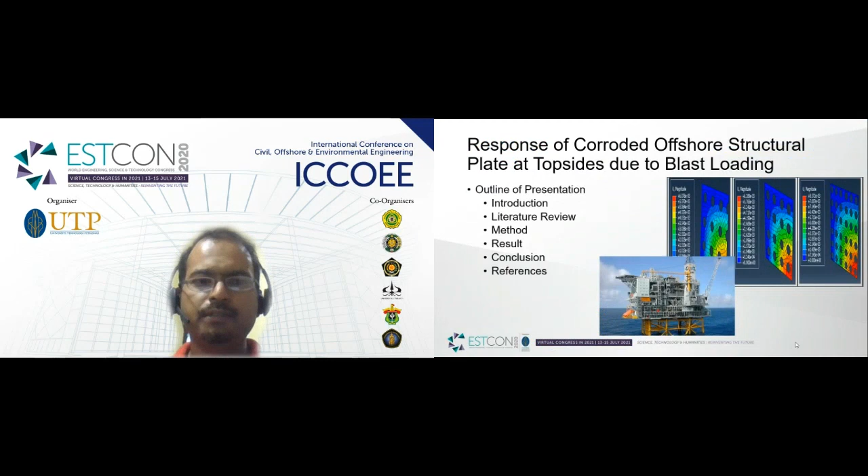Going into introduction, we know that offshore platforms are typically put in harsh environments and deteriorate during the period of operation. About 20 to 25 years is the typical lifespan of the platform. Corrosion is a common phenomenon.

It reduces the strength of structural elements, and blast in offshore platforms is a hazard, with many accidents recorded in the past, mostly at topside elements. Offshore platform design must meet safety requirements subjected to extreme loading conditions, and blast is one of the vital extreme loadings, generating the most impact.

It is important to know the response of an aged offshore topside structure that has undergone corrosion subjected to blast loading, as possible accidental explosions could occur.

There are numerous studies on the effect of blast loads imposed on non-corroded structures, but very few on corroded structures with blast loads. So in this study, we represent the offshore platform structural element as a plate element.

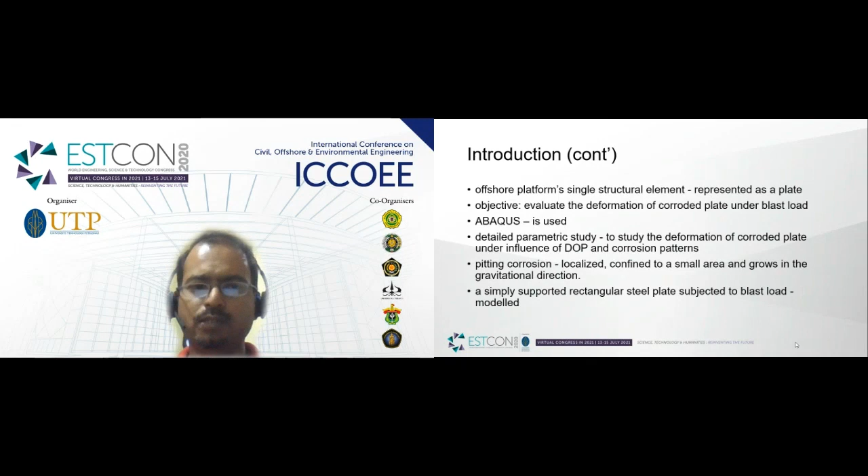We have utilized different corrosion patterns. Pitting corrosion is a localized form confined to a small area and grows in the gravitational direction. For this study, a simply supported rectangular steel plate subjected to blast load was modeled and studied.

Looking at the literature, blast load is categorized as temporal and spatial pressure distribution. Pressure rise time, maximum pressure and pulse duration are the temporal parameters, and the pressure is considered uniformly distributed. Response towards blast load may either be determined by nonlinear dynamic FEA or by simple calculation.

FEA stands for finite element analysis. Both methods should be based on single degree of freedom analogies and elastic-plastic method of analysis. Blast response is classified into 3 domains: impulsive, dynamic and quasi-static.

Looking at the past studies, we can highlight a couple of studies done by researchers recently. One, for example, looked at the transient response of stiffened plates subjected to underwater shock loading, investigating the displacement time histories of plates under different shock loadings using FEA.

Another study examined experimental and numerical studies on rectangular plates subjected to underwater explosion, looking into strain rate considerably affecting the deformation time history.

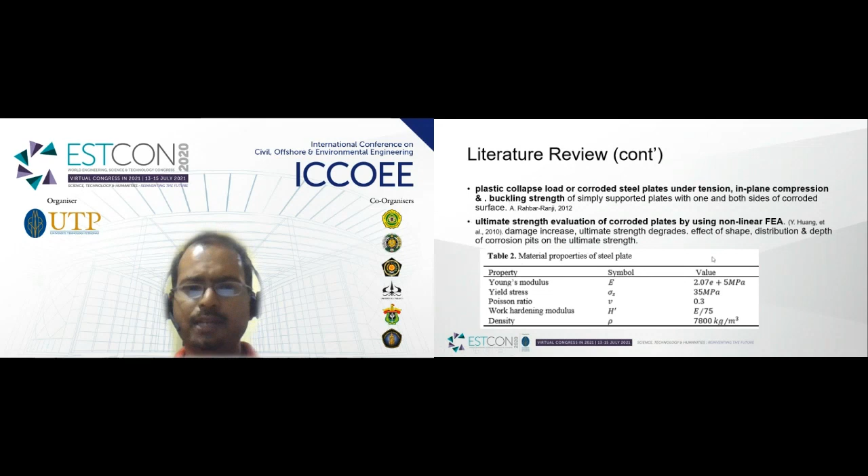Coming to my study, we have modeled the blast in an impulsive form. Following this model, shown on the table, there was a linear increase to 2.5 bar, and the pressure is maintained for a certain period of time before coming down to zero again.

All this happens in a very small time frame, 0.1 seconds or 100 milliseconds. The plate is modeled as a 10 mm thick plate with a breadth of 600 by 600 mm, a square plate.

The aspect ratio is 1, slenderness ratio is 60, and no geometric imperfection or welding-induced residual stress is modeled. It is a simply supported boundary condition plate. The model uses 3D deformable shell elements with a solid and homogeneous section.

The corrosion is modeled as a cylindrical pit with a diameter of 30 to 40 mm, located at the plate surface, pressure face, with the corrosion pattern on one side of the plate only. Material properties are assumed according to Table 2 shown earlier from the literature.

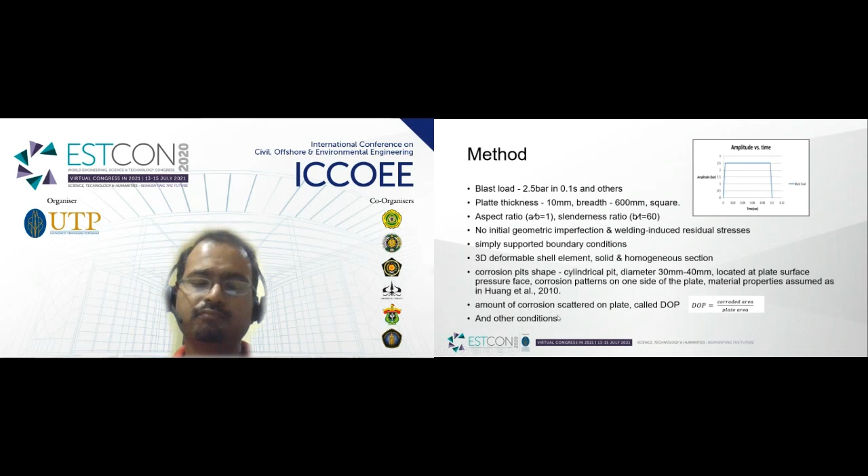The amount of corrosion is measured in a ratio called DOP, which is the corroded area over the plate area. DOP is the degree of pitting. And also many other supporting conditions are mentioned in the plate.

So coming to the results. When we analyze the plate with a couple of different degrees of pitting affected by blast load, the blast load was varied in different milliseconds. Since the plate is quite big, 600 by 600, we tried to minimize the modeling effort by having a symmetrical model, analyzing a quarter of the actual size. You can see the different figure frames showing the different degrees of pitting adopted, in terms of the physical position and the diameter of the pitting.

The graph shows results in terms of percentage of deflection, measured according to this formula: corroded deflection minus uncorroded deflection, over the uncorroded deflection. So this is how we obtain the percentage of deflection.

When we look at percentage of deflection over the different degrees of pitting, the one on the left bottom axis is the smallest, the one on the right is the highest. We can see a slight upward trending pattern up to a certain extent, and suddenly there's a big jump between the maroon and the green colors, which is actually 22.4 percent to 28 percent. There's a vast jump in deflection percentage, and after 28.28 percent, it gradually trends downwards. So this is an interesting fact we found.

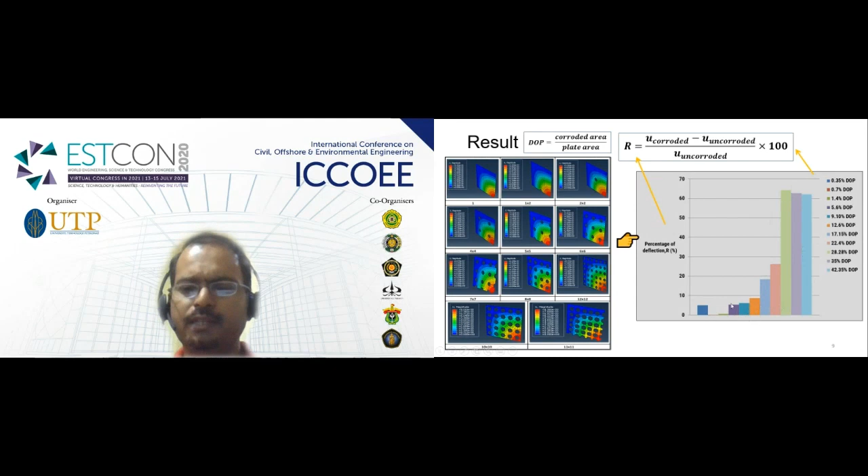Number two, when we look at stress distribution and deflection over time with regard to different degrees of pitting, we also see an interesting finding. We compared this with the control, the non-corroded plate, and we can see an obvious pattern especially on the blue, purple, and orange lines here, and also the same blue, orange, and purple lines. So we can see a stark difference in terms of deflection magnitude as well as stress distribution pattern over time.

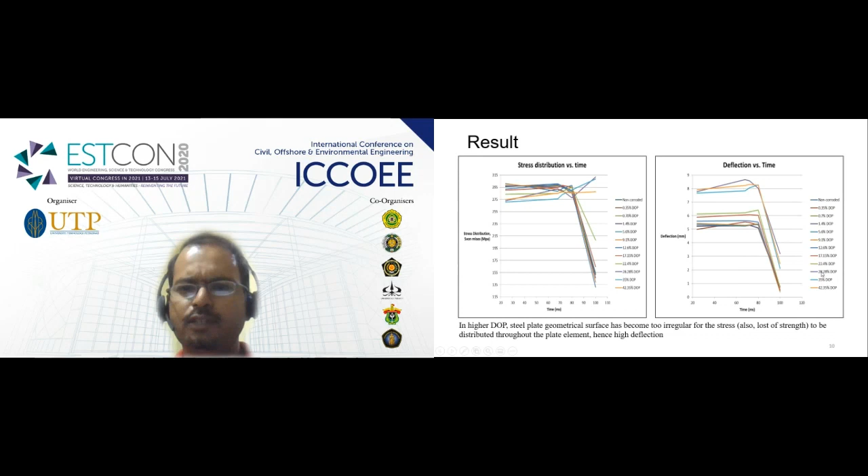What we observe here is that in a higher DOP, the steel plate's geometrical surface becomes too irregular for the stress and loss of strength to be distributed throughout the plate element, hence higher deflection. This happens in a higher degree of pitting, where the plate becomes too irregular for the stress distribution and to take the load, so it has lost its strength. Because of that, we observe higher deflection in those higher degrees of pitting, especially 42.35, 35, and 28. So this is the obvious result we have obtained.

To conclude, deformation of the plates under the influence of degree of pitting is observed. Deflection of the plate increases with increasing DOP, but having two major patterns as described, with a stark difference at a certain extent, especially when the percentage of degree of pitting increases, causing a sudden increase in deflection.

Plates with DOP 0.35 percent to 12.6 percent have lower deflection. This is a good finding, showing the degree of pitting we can allow to limit the deflection. Higher DOP means the steel plate's geometrical surface becomes too irregular for the stress and loss of strength to be distributed throughout the plate element, hence the high deflection.

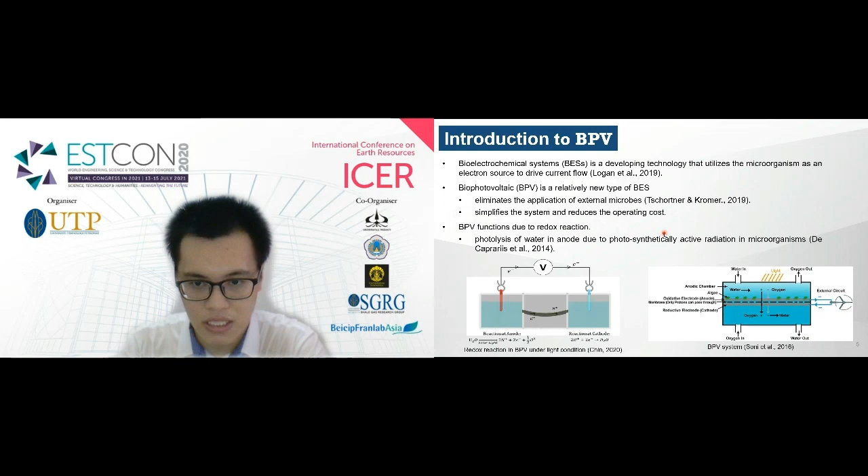Introduction to BPV: biophotovoltaic is a relatively new type of bioelectrochemical system that utilizes microorganisms such as bacteria, cyanobacteria, and microalgae as an electron source to drive current flow. It can eliminate the application of external microbes to simplify the system and reduce operating costs through the catalyst. BPV functions through redox reaction. The photosynthesis of the microorganism results in photolysis of water, which produces oxygen, protons, and electrons that play a vital role in the energy production of the cell.

The excessive electrons will transmit to the external environment to drive current flow. As you can see in this figure, the electrons released by the photosynthetic material are absorbed by the anode and transmit to the cathode to drive current flow.

Now I will talk about the benefits of floating BPV. Floating BPV transforms traditional land-based BPV into a free floating structure using floating technology. Microalgae need a large surface area for sunlight absorption to achieve optimal power output, which can waste precious land resources. However, floating BPV can turn uncommercial ocean surface into a solar power plant to solve this problem. Also, wave motion can enhance mass transfer and mixing efficiency between nutrients and cyanobacteria or microalgae.

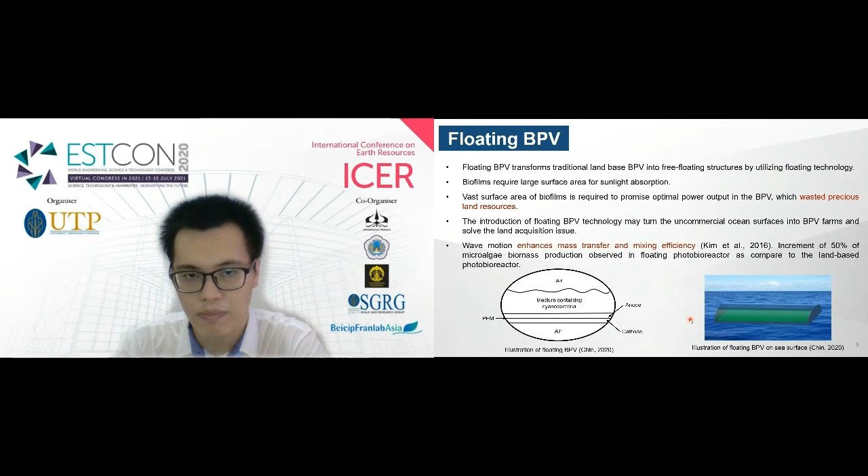An increment of 50% of microalgae biomass production can be observed, and it will result in higher power output of the BPV device. Here are figures illustrating the floating BPV design and also floating BPV on the sea surface.

Now I will go to the experimental section. Spirulina platensis, a kind of cyanobacteria, is chosen as the electron source in this study. It is cultivated in a sterilized container under room temperature with a stable light source, and Zarrouk medium is used to provide nutrients and maintain the inoculum.

For the BPV model, a two-chamber BPV with dimensions of 16.5 cm length, 11.5 cm width, and 8 cm height was fabricated, as shown in this figure. The chamber is connected by a stopcock.

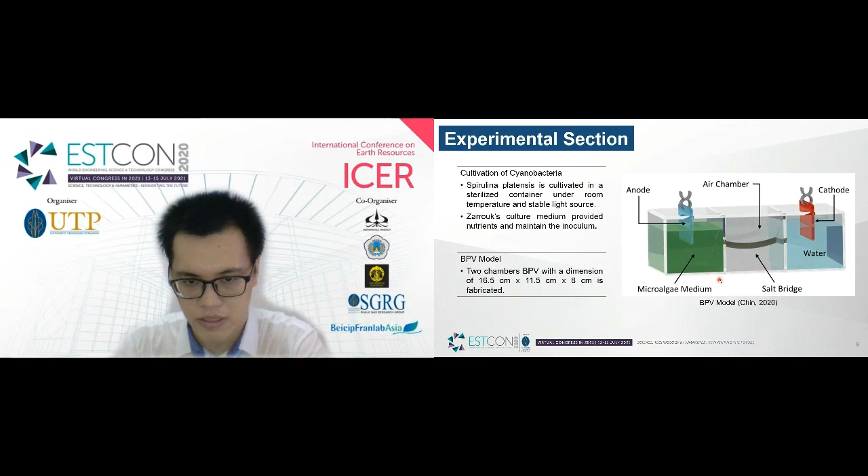For the experimental setup, 150 milliliters of cyanobacteria medium and distilled water are filled in the anode and cathode chambers respectively. The main components of the floating experimental setup include a belt-driven linear actuator, which moves at a constant frequency to generate regular waves and trigger sloshing of the medium, a DC motor that provides momentum to the system, a rotary encoder to record the displacement of the linear actuator and maintain accuracy, and an Arduino Uno board with a PID controller to provide general control via coding and procedures.

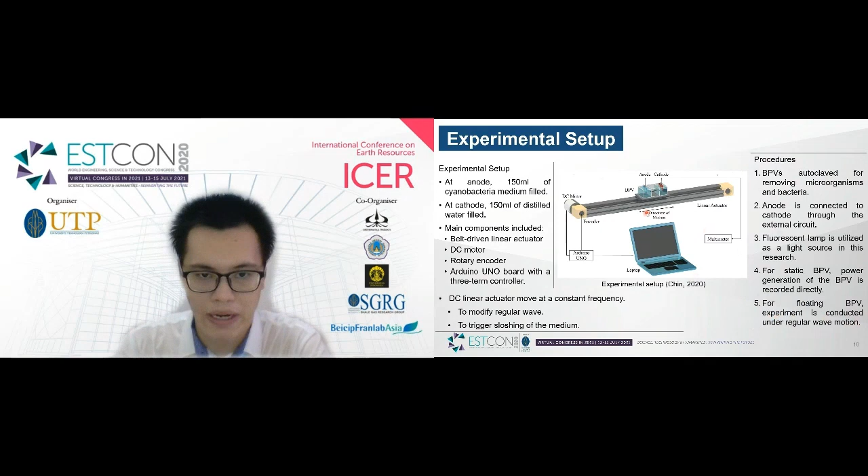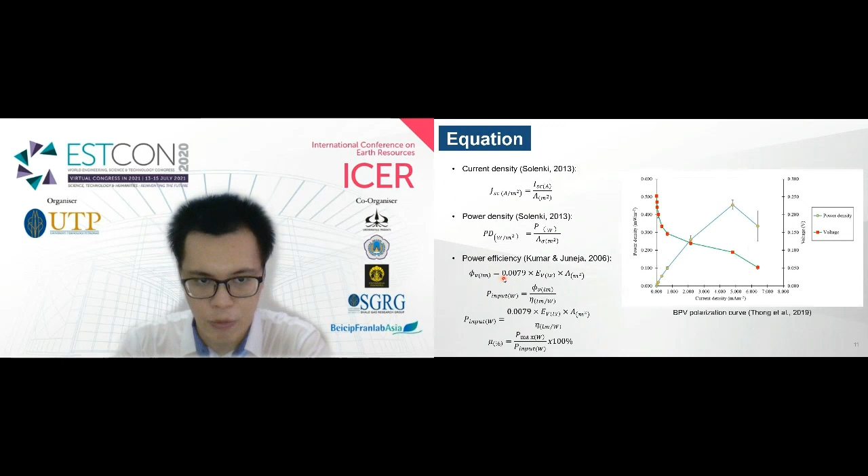For the experimental procedures: the BPV is autoclaved to remove microorganisms and bacteria, and a light source is provided for light conditions. For floating BPV, the experiment is conducted under regular wave motion modified using this experimental setup. Using the equations, current density, power density, and power efficiency are recorded in this study. For power efficiency, the power production by the device per meter square is divided by the solar power absorbed by the device per meter square.

Results and discussion: power output is highest in steady light conditions, followed by steady dark conditions, and then floating light conditions. More electrons are released in light conditions. Wave-induced motion reduces the power output of the BPV model, and BPV produces electricity in both light and dark conditions.

Now I will go to the conclusion. As a newly introduced study, there is a lack of relevant studies on the interaction effect of wave motion on the power generation of BPV. This research developed a floating BPV prototype to explore the influence of wave-induced motion on the power production of BPV through experimental study. This is my reference.

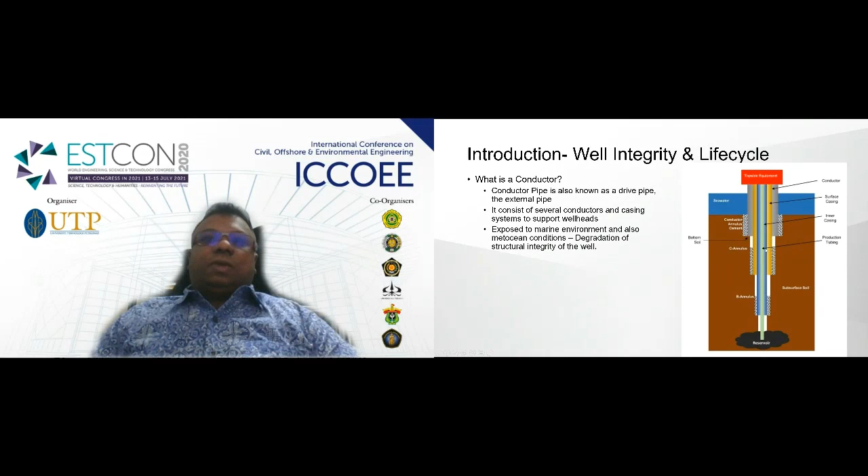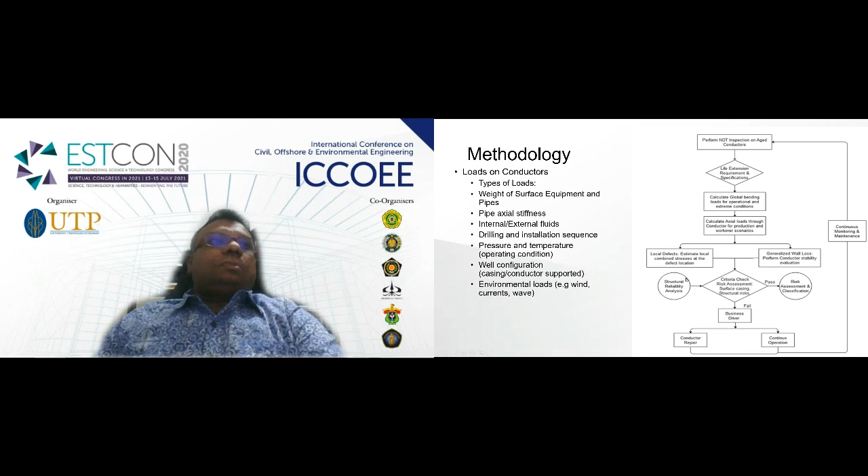Next, the analysis: strength and stability check. This method is adapted from Bohr and Stahl, right? So the conductor casings were modeled as a multi-pipe in pipe.

From the inspection data, the remaining wall thickness on the conductor at the splash zone can be divided into minimum wall thickness and averaged wall thickness. So the strength and stability of the conductor are assessed using FlexCom, which is developed using elastic limit methodology presented in the API guidelines, based on the theory laid down by Bohr and Stahl and subsequent publications.

This assessment is conducted using the bending moments determined from the dynamic analysis and calculated axial loads as inputs. So for structural systems under combined axial compression and bending loads, it is necessary to check that the stress and stability of the system are at an acceptable level.

The strength and stability check results are expressed in terms of interaction ratios, which are 8 in our check - in stability check we have 4, and in strength check we have also 4. An IR value greater than 1 indicates that the allowable design criteria are exceeded.

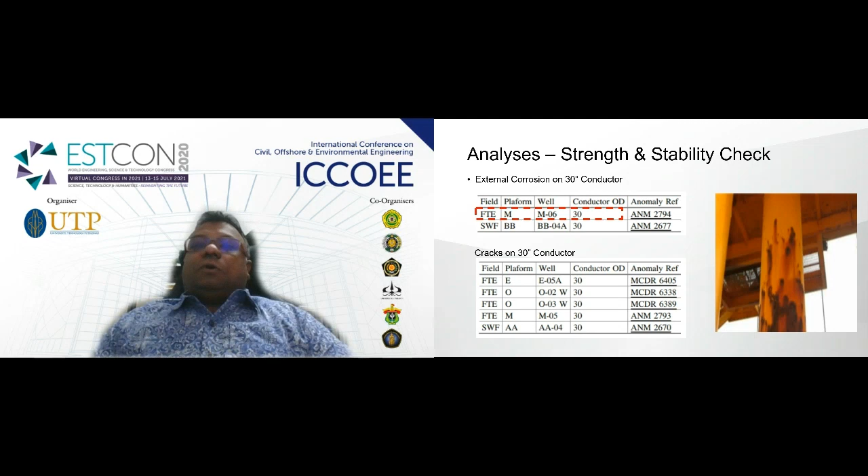An approximation for the wall thickness is made based on the UT reading and visually assessed quality of the conductor casing. The repair or mitigation will be recommended based on the strength and stability check outcome. If the corrosion wall loss is over a significant portion of the conductor length, a local spot repair may not be possible. In such scenarios, recommendations similar to internal corrosion defects may be made for managing external defects.

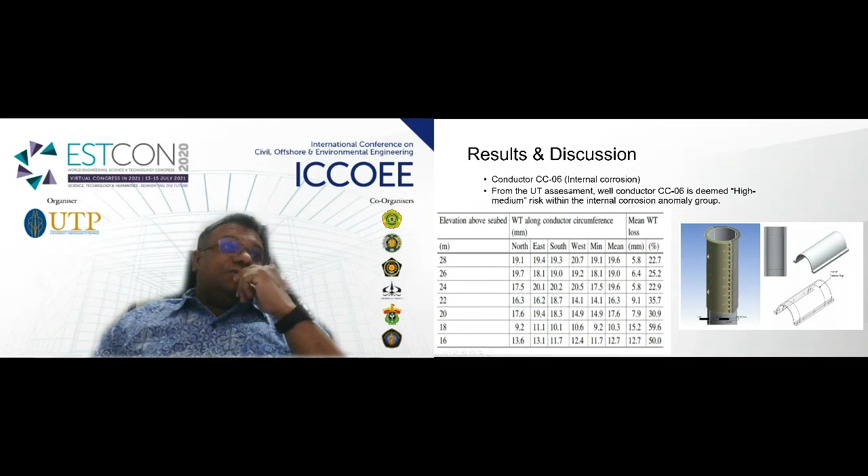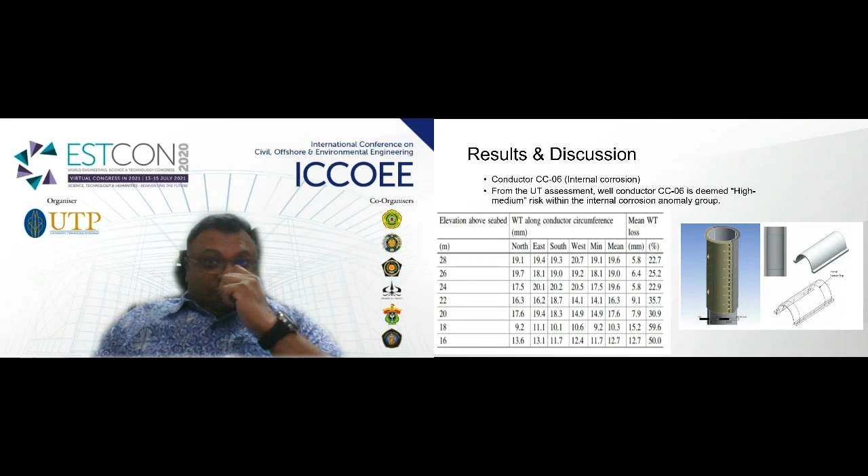Results and discussion. On this slide, you can see we have taken a sample of a conductor, CC06 label, internal corrosion. By using the existing well inspection records performed on this well conductor, CC06, the assessment is carried out and presented in this section.

This was deemed high-medium risk as per the risk assessment. As you can see here, on the elevation above the sea bed, at 28 meters, the wall thickness loss is about 22.7%.

As it goes higher, closer to the splash zone area, at around 16 to 18 meters, the wall loss is about 50 to 60%. So what we have proposed here is a sleeve repair for the internal corrosion.

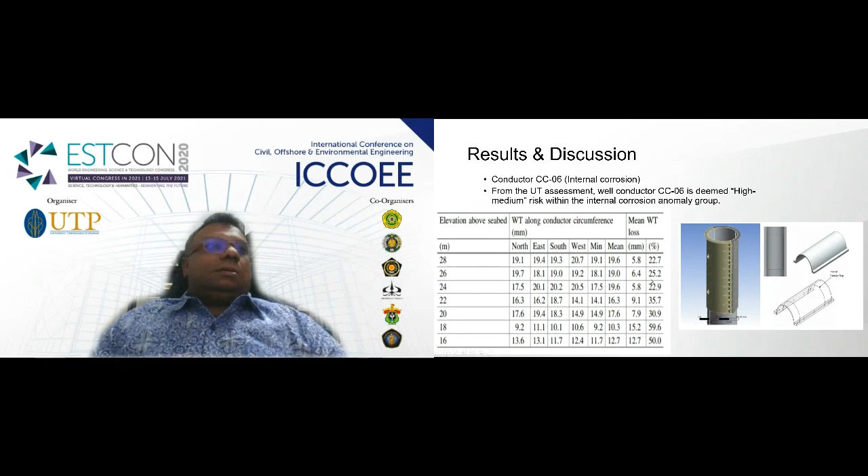Finally, the conclusion. From the structural integrity assessment performed on the conductors, it can be categorized based on the strength and stability study on the conductor and surface casing corrosion effect on the structural stability of the wells.

The minimum mean wall thickness of the conductor can be used as a measure to determine critical loads on the wells. The critical remaining wall thickness and the wells' typical loads have been calculated.

So two types of structural risks have been identified: the higher risk category that needs to be repaired immediately, and the high-medium risk, where repair decisions depend on the asset life economy assessment.

Several UT scan readings have provided information on the conductor wall thickness, which enables identification of the wells that need to be repaired. The conductors categorized as high and medium risk have been repaired by adopting innovative rigless repair methods, as shown earlier on the previous slide, significantly reducing the structural risk and cost saving on the conductors.

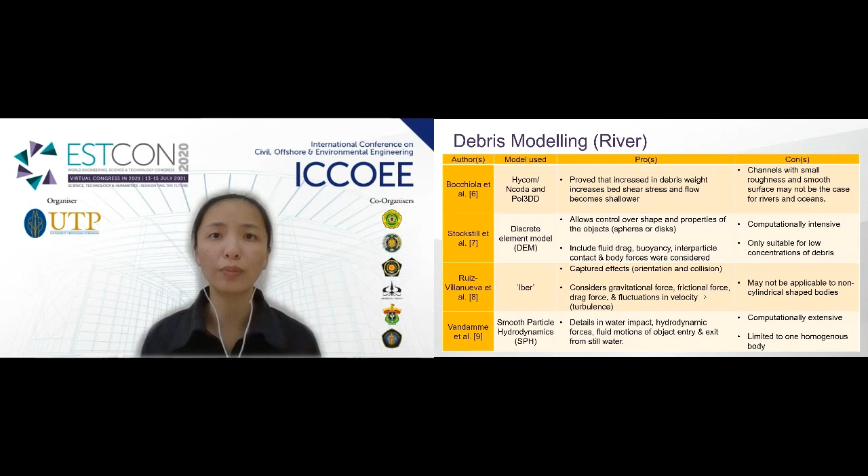Vandamme uses SPH, smooth particle hydrodynamics, and simulated details in water impact, hydrodynamic forces, and fluid motions of object entry and exit from still water. Just like the rest, this model is also computationally intensive and only limited to one homogeneous body. This is an example of river modeling that is used.

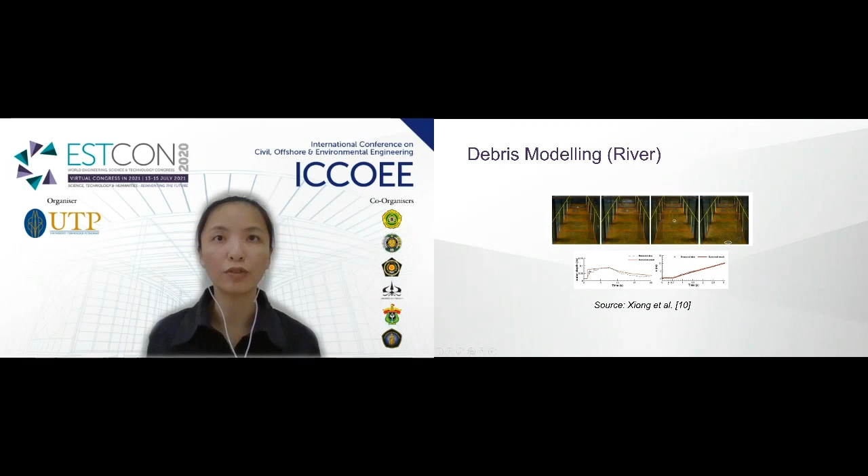Debris modeling in river usually incorporates detailed processes of homogeneous debris. It is also only limited for very specific cases, as mentioned earlier, either treated as a sphere or treated as a cylindrical object. It is normally computationally intensive as it incorporates different kinds of physical processes from the debris itself, such as drag force and collision forces.

Existing models can be improved for better accuracy at larger spatial area, so that these models will not only be limited to such a small area, but can be incorporated into larger coastal area.

As we come to discussion and conclusion, large-scale modeling is normally used for very large spatial area, which means it does not incorporate the detailed processes of debris modeling, and only focuses on passive particles or passive concentration of particles. Whereas for small-scale modeling, it only revolves around a very specific object. It includes different forces, but these forces take a very long time to run.

For example, if we want to find a missing body in the coastal area, it will not be practical if it takes months or weeks to run the simulation, to include all the processes and run the simulation, but it takes a very long period of time to understand how it flows from one point to another.

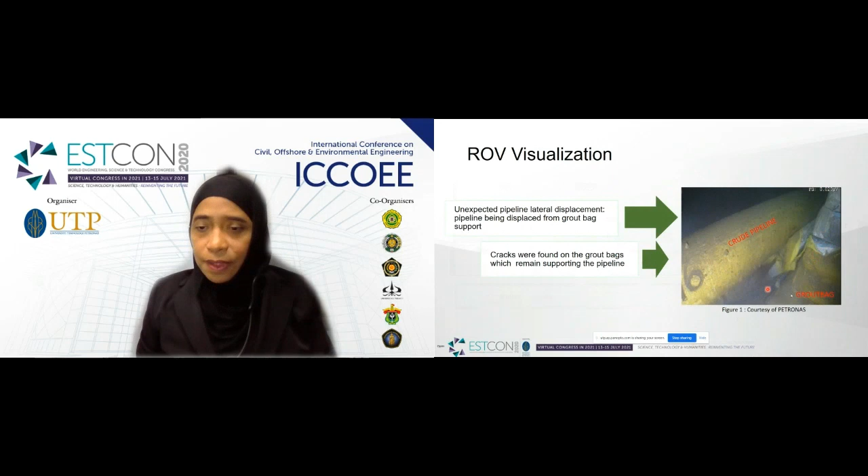The most difficult part of the exercise was to study various survey information which was performed by different surveyors. Our first effort was to plot the survey coordinates on the same CAD file to identify any significant variation in the pipeline configuration. The support position as reported on the ROV inspection was used to match the survey information.

Following correlation of the survey information with the ROV anomalies listing, displacement at other locations was observed and confirmed. More than 10 buckles were identified.

Our next step was to perform a global buckling screening assessment. We used the method stipulated in DNV F110. This involved estimating the soil restraint, the effective axial force due to pressure and temperature, and the critical buckling force of the pipe body. The result of the analysis shows that the 30 kilometer pipeline is susceptible to global buckling.

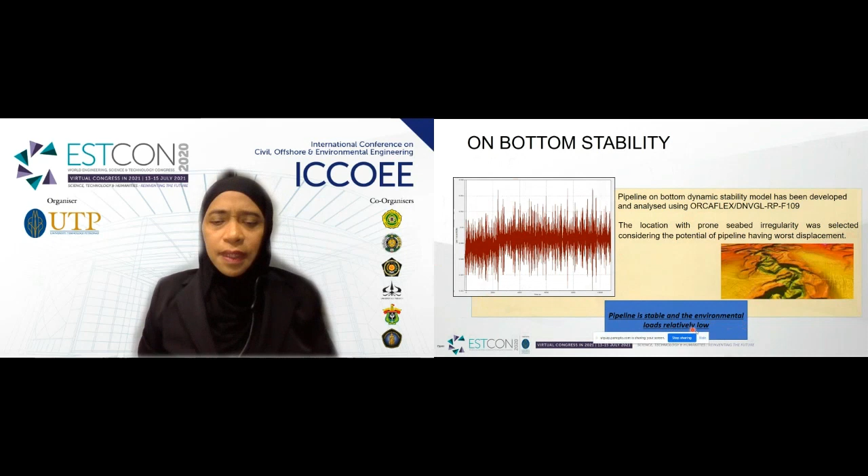Now that the assessment result significantly inclined towards global buckling, we decided to verify the integrity of the buckle using the uncontrolled buckling assessment approach and performed it using Abaqus FEA software.

A question was raised as to what caused the grout bag to crack in the middle and break at the side. We then performed a simple FEA analysis with the absence of the ineffective support. The result indicated that the vertical load acting on the grout bag was 2 times higher than the grout bag's payload capacity. This explained that the grout bag was loaded more than it could handle, which caused the crack.

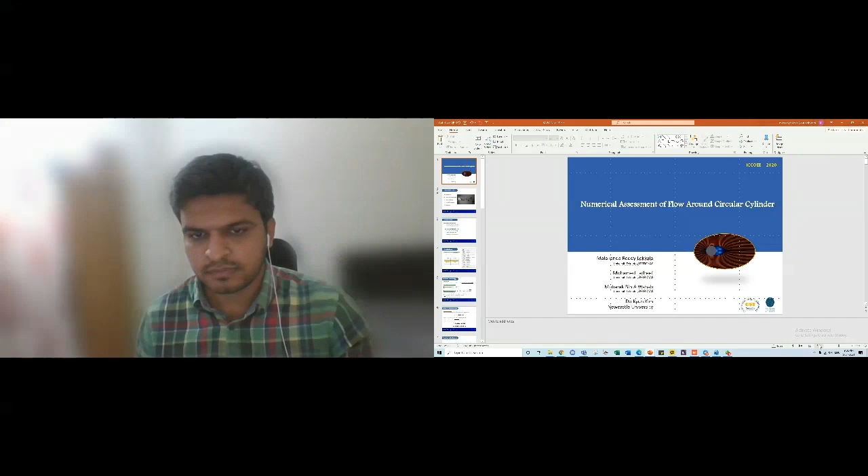Hello, my name is Malkunda Reddy, and today I'm going to present numerical assessment of flow around a circular cylinder in transition zone. The presentation outline is as follows: introduction, followed by numerical methodology, numerical setup, numerical results and discussion, and finally conclusion.

Coming to introduction, the dynamics of flow around circular cylinders has been a very challenging task for decades due to the complexity of wake formation, and this wake formation totally depends upon the Reynolds number. When the flow passes over the circular body, it causes vortex-induced vibrations, which impose high cyclic stresses that lead to high fatigue damage.

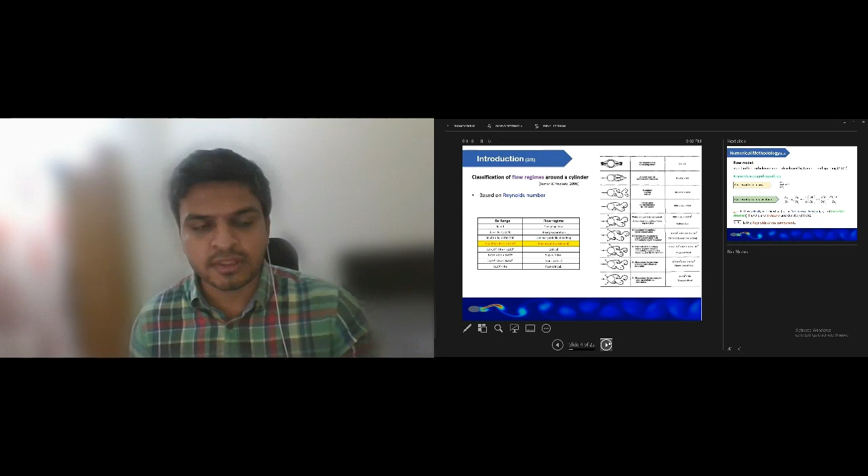The flow regimes are categorized into different types based on the Reynolds number, and you can see on the table here. So in this study, we are going to use the subcritical regime, which is called the transitional regime.

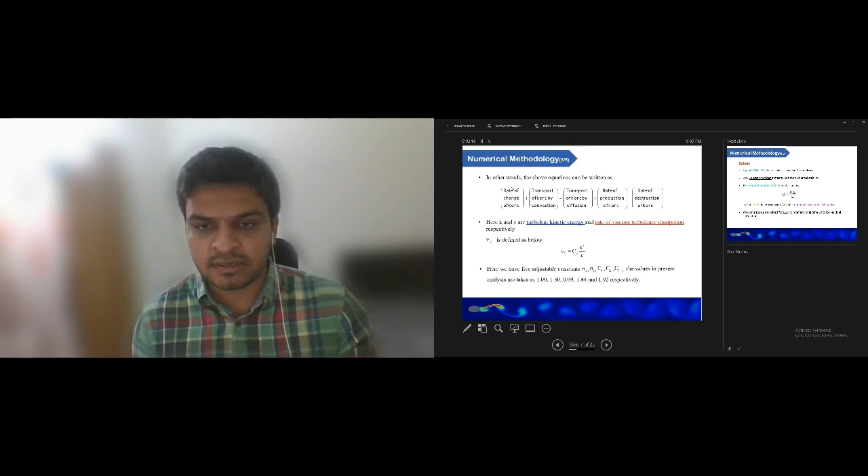The turbulent equations for K and epsilon can be seen here, and in other words those two equations can be defined as: rate of change of K or epsilon, plus transportation of K or epsilon by convection, is equal to transportation of K or epsilon by diffusion, plus rate of production of K or epsilon, minus rate of destruction of K or epsilon.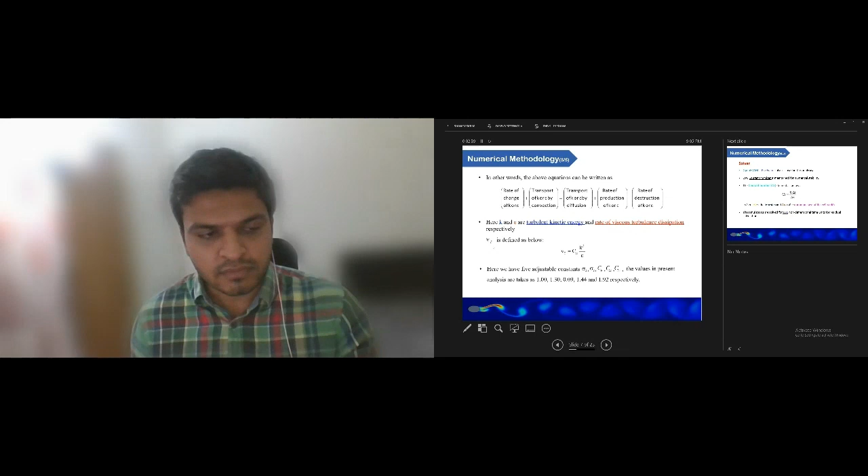This is a theoretical description of those two equations, where K and epsilon are the turbulent kinetic energy and rate of viscous turbulent dissipation rate. We have 5 different constants used in this analysis, which are derived from experiments.

OpenFOAM, which is openly available for analysis, is used to solve this. From OpenFOAM we have a pisoFoam solver used in this analysis, and a low Courant number is maintained to attain numerical stability. The Courant number is defined as velocity times time step divided by minimum cell width. The Courant number plays a vital role, because when it is greater than 1, the properties of one cell are transferred to the other cell, it moves abruptly, and numerical stability will be lost.

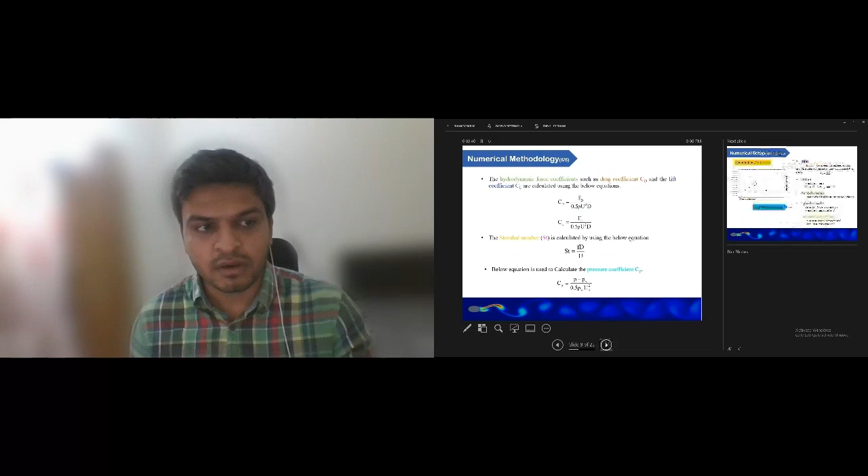So we have used 600 numerical non-dimensional time steps for residual calculations, and as a result the time step significantly decreases here. In this analysis, we have calculated different types of hydrodynamic coefficients, such as the drag coefficient, lift coefficient, pressure coefficient, and Strouhal number.

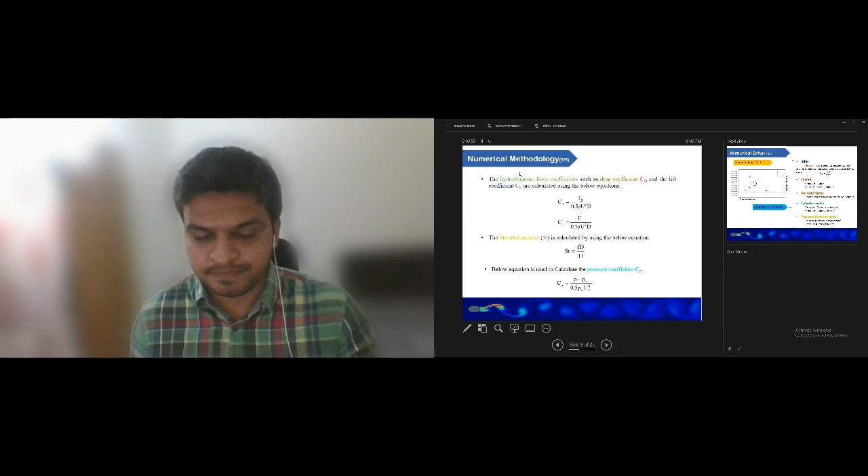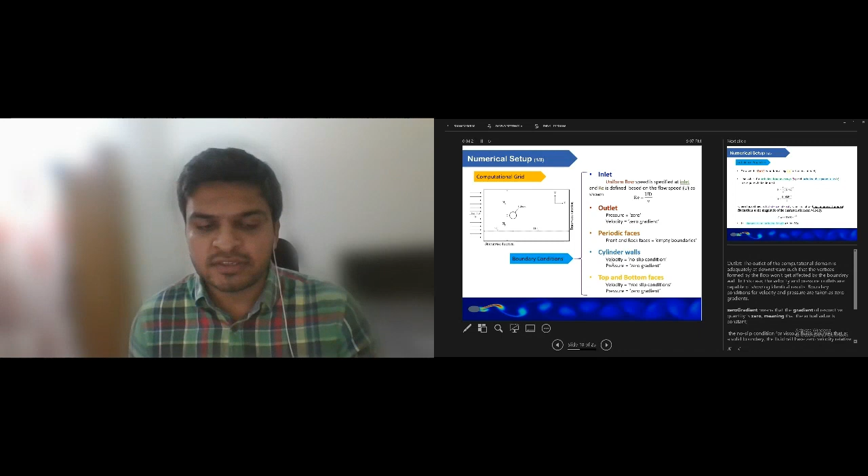We have used a rectangular computational grid to investigate the flow around the circular cylinder, and these are the dimensions of it. We can see the boundary conditions for inlet and outlet. Periodic faces are nothing but front and back faces; as this is a 2D case, we have given empty boundary conditions for front and back. For cylinder walls, we have given velocity as a no-slip condition and pressure as zero gradient. For top and bottom faces, velocity is a no-slip condition and pressure as zero gradient.

Results and discussion: we performed convergence studies to obtain the optimal mesh size, grid size and time step. Initially we used constant grid sizes in the streamwise direction and varied the transverse direction. As the length of the transverse direction increases, the effect on the hydrodynamic properties reduces and the values converge at one point.

From this analysis, we used 5 times LC as the transverse direction length, and similarly 12 times diameter for the streamwise direction.

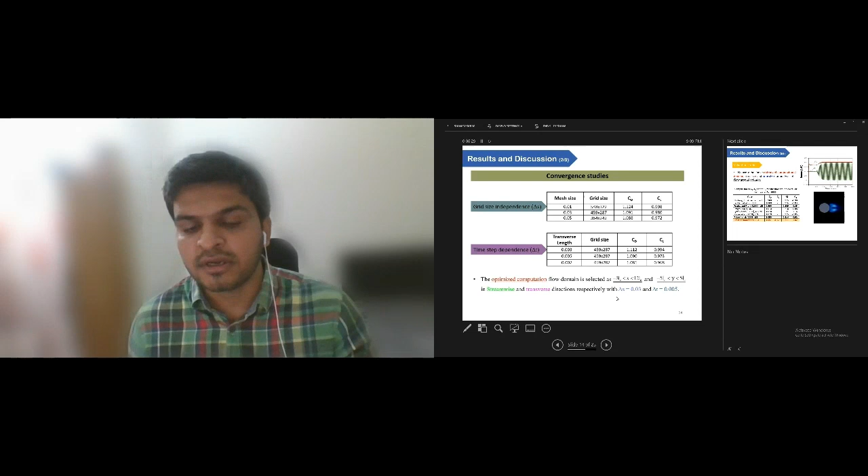We also carried out analysis for optimal mesh size and time step dependence. The optimal computation domain is selected as -3 times LC to 12 times LC, and 5 times LC to 5 times LC towards the left and right directions. The mesh size is defined as 0.03 and delta T as 0.005.

Based on the optimal mesh, optimal computation domain size, time step and grid size, we obtained these results shown in the figure: drag coefficient and lift coefficient.

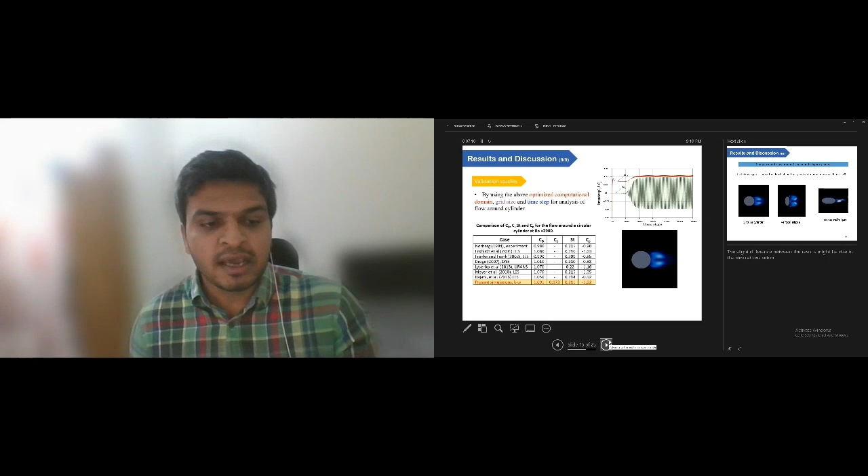The drag and lift coefficients, Strouhal number and pressure coefficients agree well with previous experiments and numerical results that are already published. There is a slight difference, which might be due to this simulation setup.

The optimized flow domain is used to analyze the flow behind the elliptic cylinder with different aspect ratios for different time steps, and for different aspect ratios we can see how the flow behind the elliptic cylinders and the circular cylinder varies.

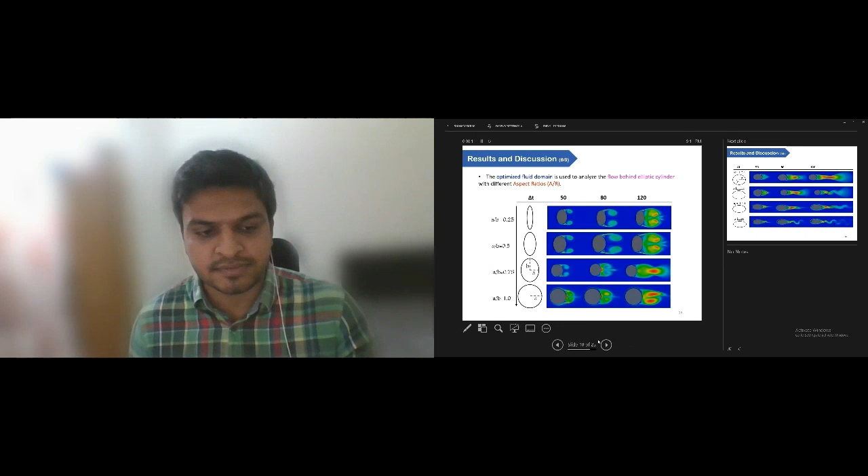This is similar, showing different aspect ratios with different time steps: 0.25, 0.5, 0.75 and 1.0. 1.0 refers to the circular cylinder, and the others are vertical and inclined ellipses.

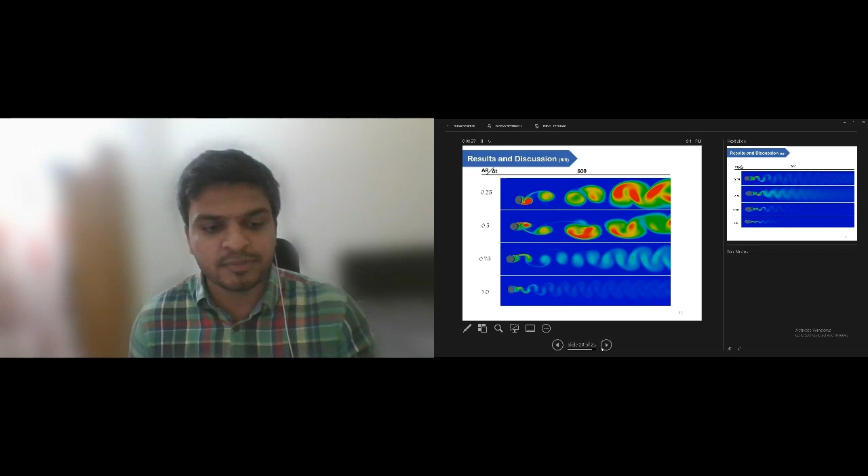Conclusion: the flow around a circular cylinder at moderately large Reynolds number was investigated. An open source CFD code, which is available as OpenFOAM with the pressure implicit with splitting of operators, PIMPLE form, is used to analyze the flow around cylinders.

Due to the wavy flow operation along the spanwise direction, the wake width expands behind the cylinder, forming a complex nature. We can see clearly that as the width of the ellipse reduces, the wake formation also reduces. Thank you.

Thank you very much, Mr. Melakonda. How are you today, sir? I am doing good, ma'am. How are you? I'm good, thank you.

So you have worked very hard on doing the analysis with the mechanics one by one, optimizing each element. If you want to bring this innovation work of yours back to the industry, what would be the optimum parameter or optimum design condition in order to minimize the impact of vortices or any failures caused by the flow? What would be your opinion and suggestions, please?

Actually, coming to this presentation, basically I've used only a single cylinder, but in industry this will be different because we will have a bundle of pipes or risers all together with minimal spacing. So I have presented only initial results in this paper.

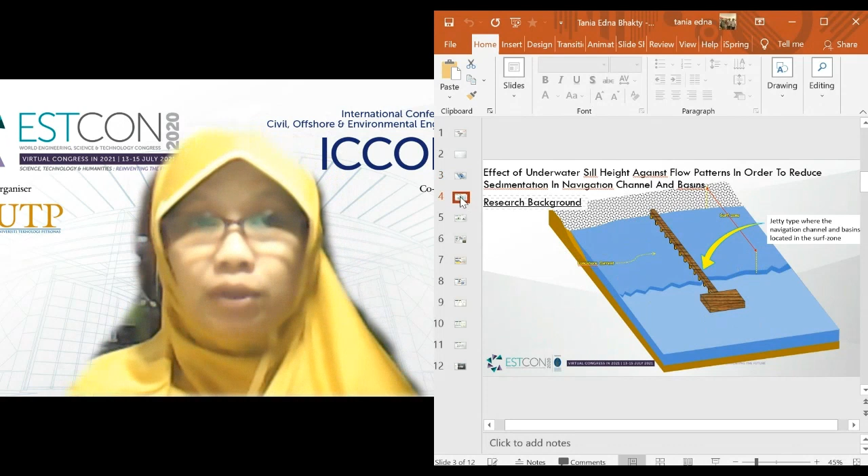To solve the sedimentation problem, particularly for a port that has already been operated, there are some alternative solutions. For example, we can extend the jetty out of the surf zone, maintain dredging, or use breakwaters to cover that area and protect it from sedimentation problems. But every solution has advantages and disadvantages. For example, dredging will interfere with port operations, and extending the jetty or constructing breakwaters will be costly.

One of our solutions is to install an underwater sill, or UWS. You can see the underwater sill here, the black one. The UWS is a submerged structure installed around the basin and navigation channel. It will protect this area from sedimentation problems.

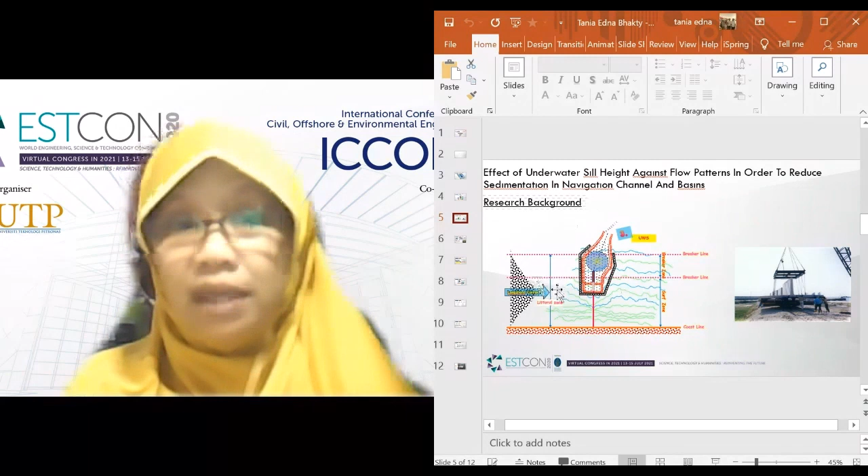This is my method to get the data from the current. This is the map I use to get the data.

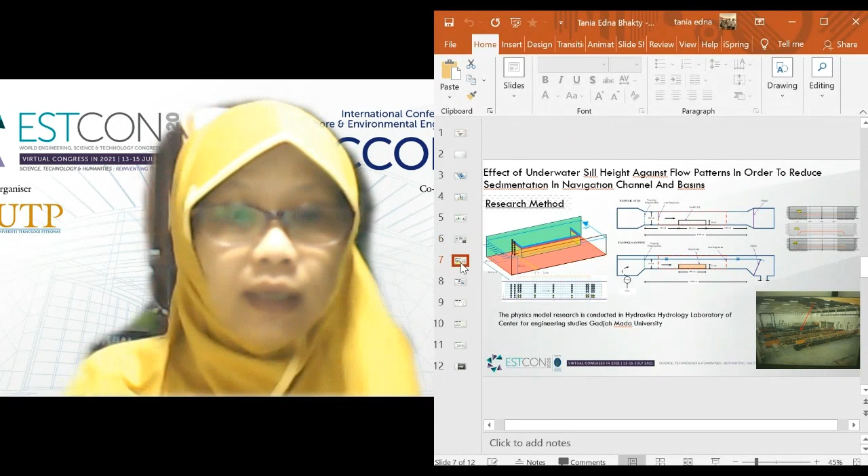This part explains why I chose the flume for my research, because a 2D physical model test is made to simulate the UWS in controlling steady uniform flow. In this case, it is expected to represent the current along the coast. The model test is carried out in a glass flume. For details of my research, you can see my paper.

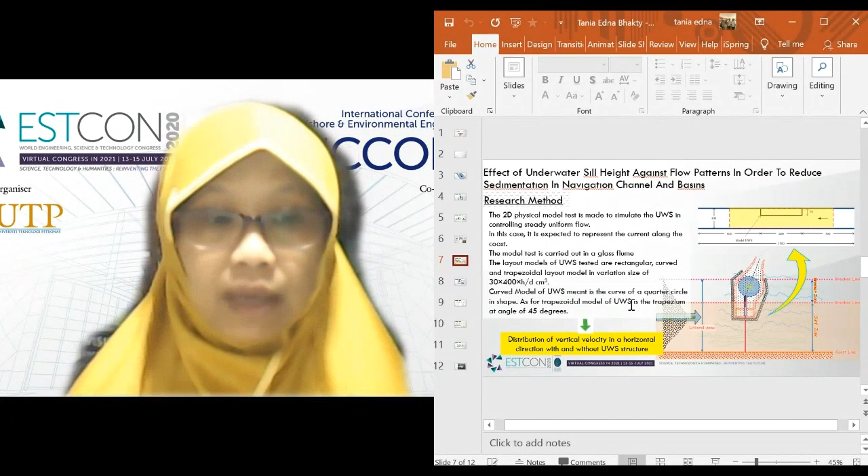In this slide, I will show you the distribution of vertical velocity in the horizontal direction. Without the UWS structure, it is theoretically determined based on the flow characteristic of steady uniform flow, using the theoretical current profile without UWS as the reference, compared to the profile of the channel with underwater sill. So the curve is made like this.

So we can see the differences between the profile without UWS and the profile with UWS. The pink curve shows that the current is deflected as a result of the UWS structure's existence in this channel.

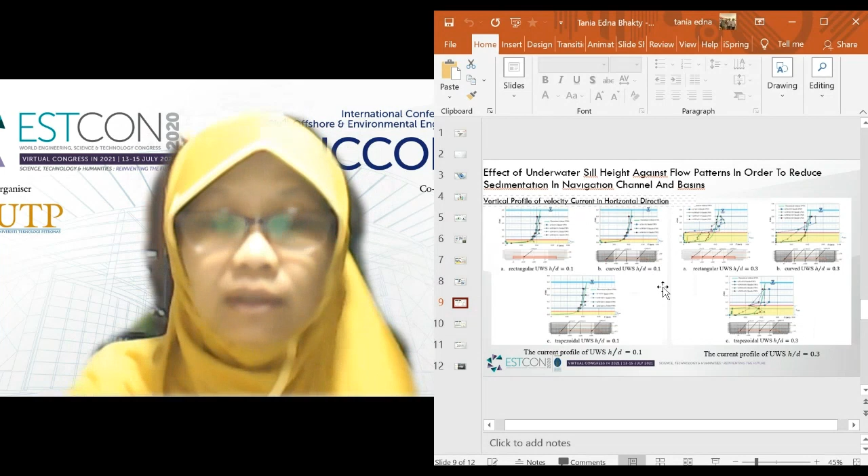This is the channel, and in this slide, this is the result of the vertical profile of velocity current in horizontal direction. I did this with H per D, where H is the height of the underwater sill and D is the depth of water — the comparison between the depth of water and the height of the underwater sill.

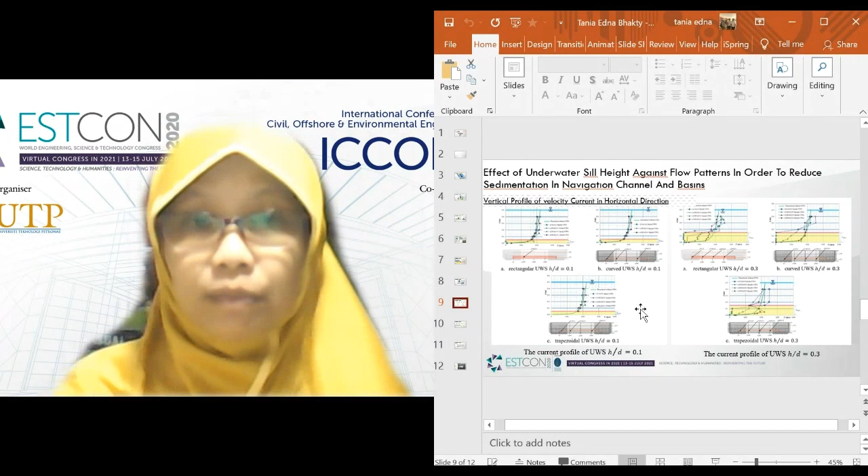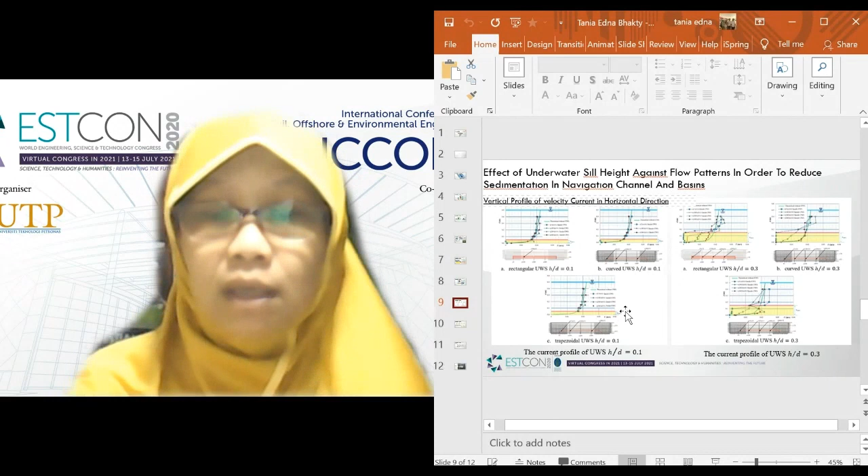This first picture shows rectangular, this one curved, and this one trapezoidal, with H per D of 0.1. In the second picture, you can see the current profile with UWS at H per D 0.3.

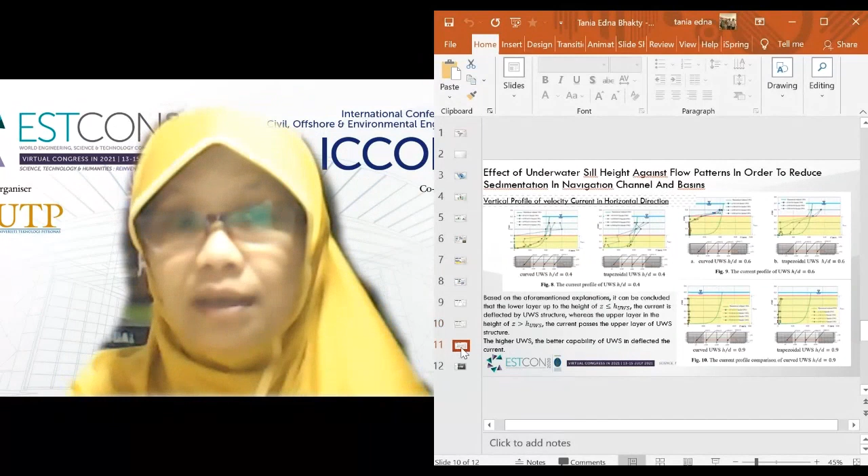Because of the conclusion, I will show you the conclusion, which will let me do the next research connected with this one, done with quasi dimension. The conclusion is that a UWS structure which is too high is more effective in deflecting the current. Why?

It's because sediment distribution in the upper layer is suspended load, while the lower layer is bed load. The function of UWS is to protect the area inside UWS from bed load, while suspended load still passes through the top of UWS and will be deposited in the basin and navigation channel. So when we install UWS, we still need to maintain the navigation channel and basin area.

In my next research, I would like to try to find the effective height of UWS that can protect the navigation channel and basin from sedimentation problems. Okay, Bapak Ibu, this is my research.

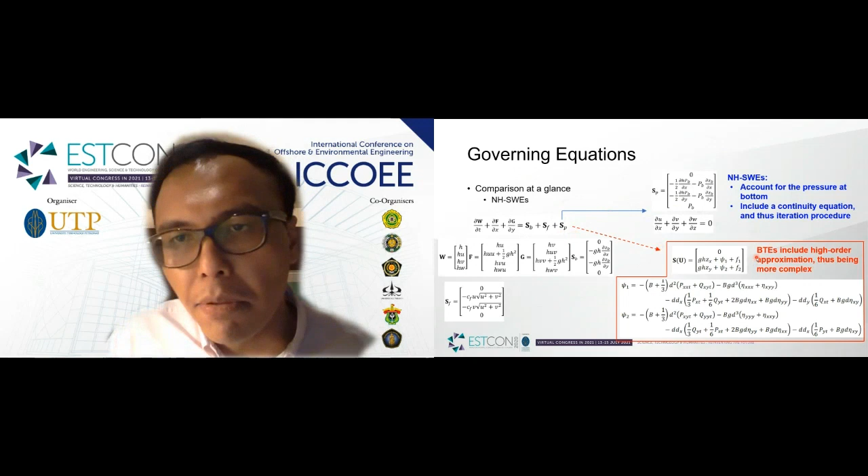I will show you a comparison at a glance between the proposed approach and the Boussinesq type equations. The main difference is in the pressure term. As you can see, the pressure terms in our non-hydrostatic shallow water equations account for the pressure at bottom, symbolized as PB, and it includes the continuity equations. That means we need an iteration procedure. In the Boussinesq type equations, the pressure term is replaced by a high order approximation, so it's more complex and probably a bit more accurate.

But we will show in the end that our model can maintain the accuracy of the Boussinesq type equations models.

We will not present the computational details in this work, but I would like to show you my recent work that can be downloaded under this DOI. It's about the extension of artificial viscosity technique for solving 2D non-hydrostatic shallow water equations.

This is the benchmark test that we use in our work: the tsunami solitary wave on a conical island. This is a laboratory case performed in 1995, using a 25 by 30 meter basin.

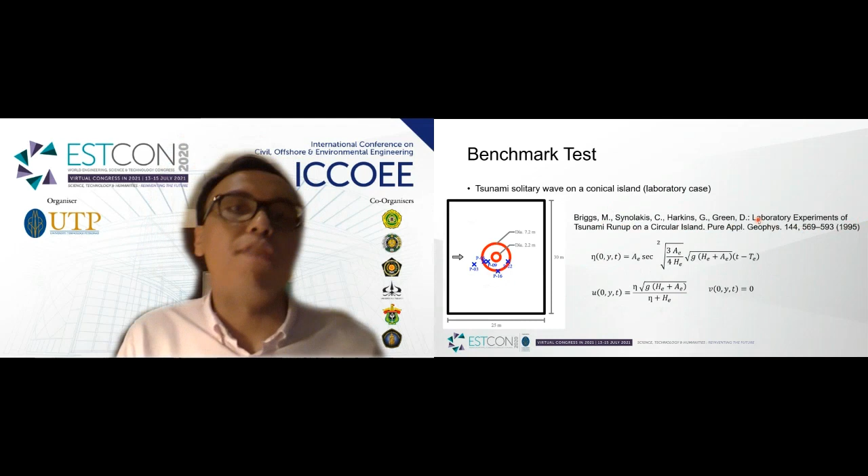On the left side, the boundary conditions are set as a solitary wave, with this water level equation shown here. On the left side also, we give the velocity in the x direction with this equation, and the velocity in the y direction is set as 0. You can read the original paper for the detail of the laboratory case.

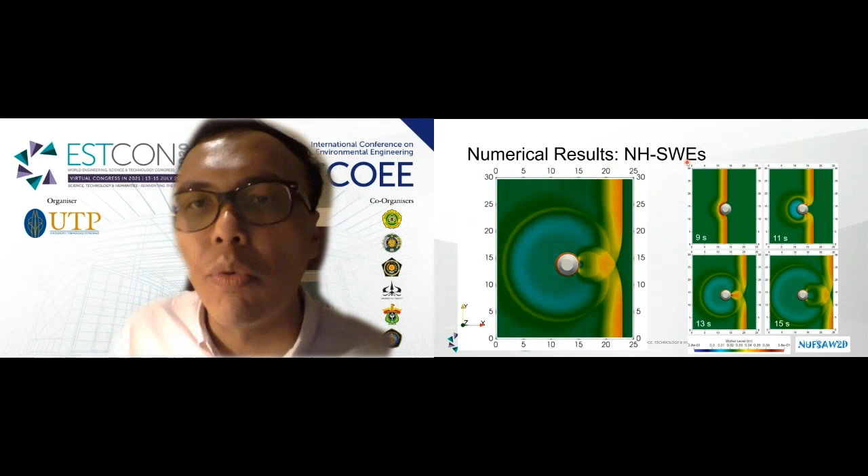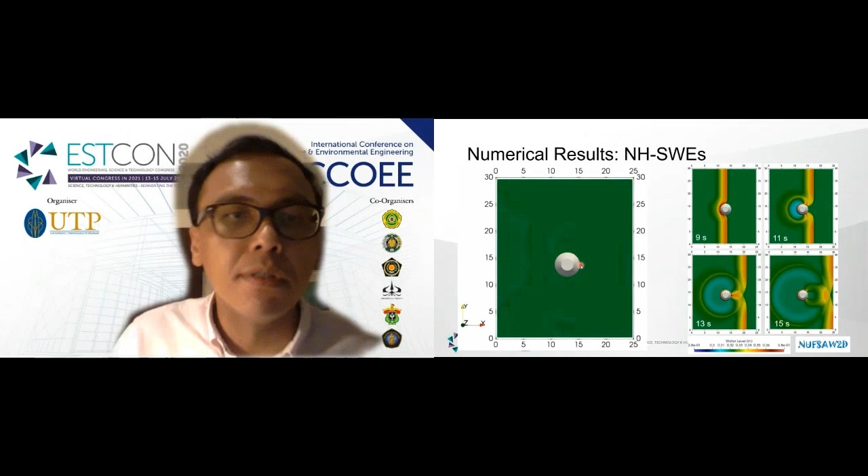This is our numerical results performed using non-hydrostatic shallow water equations. Our model can capture the collision of waves behind the conical island. You can also see there is a wet-dry mechanism on the conical island that is modeled accurately by our model.

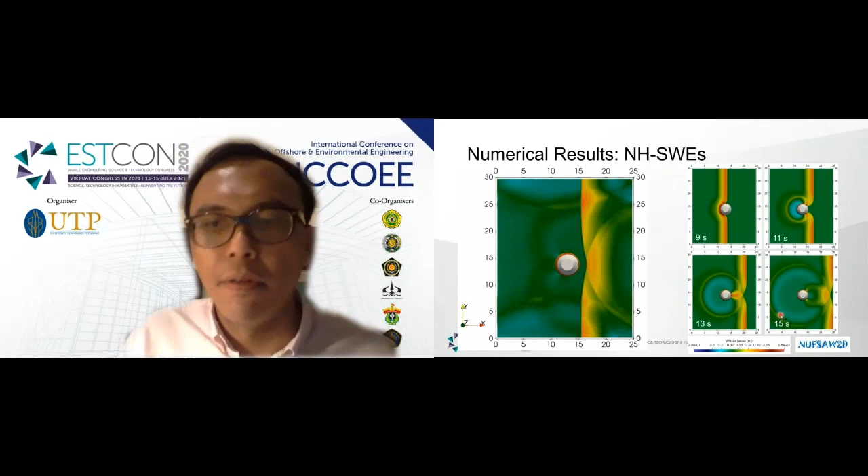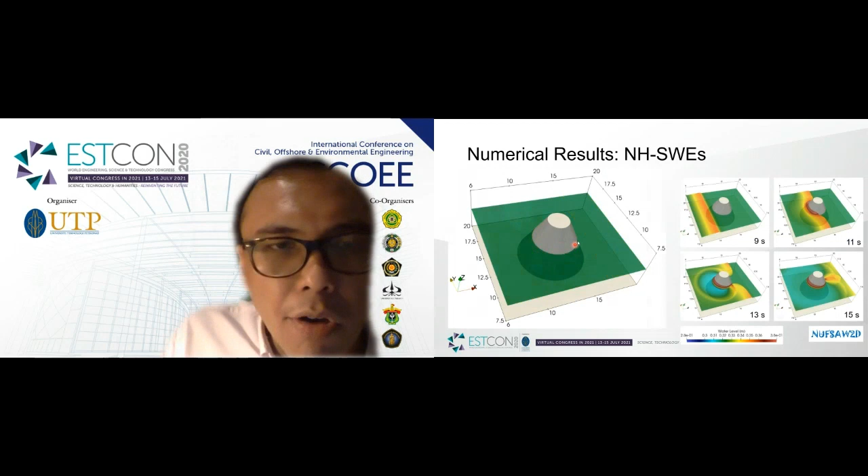We present here the capture of the wave propagation from 9 seconds until 15 seconds. This is the detail on the conical island. You can clearly see the wet-dry mechanism on the conical island has been accurately and stably simulated by our model.

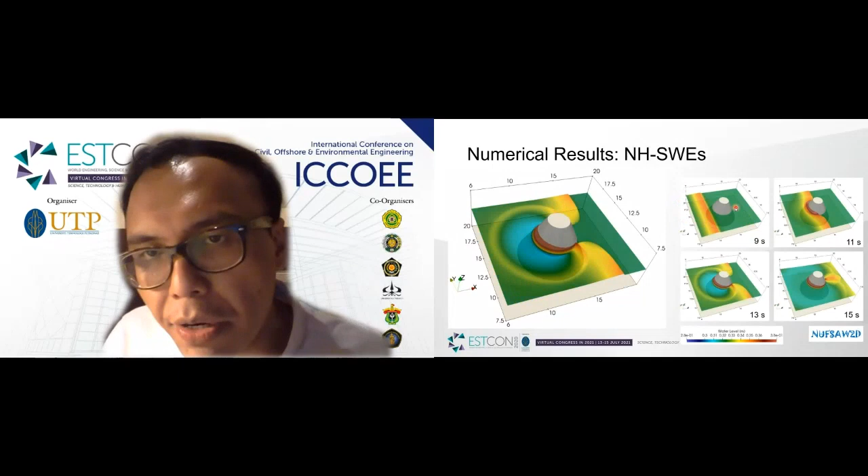We also present here the detail of the wave propagation from 9 until 15 seconds.

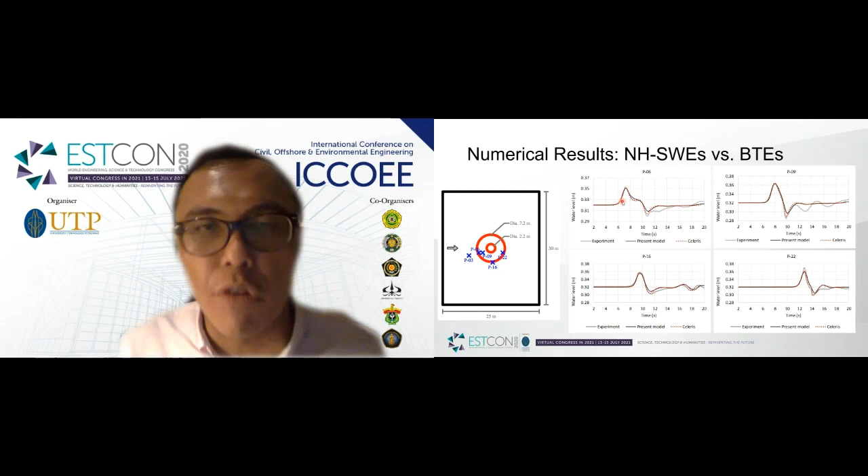Here we present the comparison between the result of our model, non-hydrostatic shallow water equations, versus Boussinesq type equations. Our model can compete with the high order Boussinesq type equations. For example, between 10 until 12 seconds, Celeris is the Boussinesq type equation model.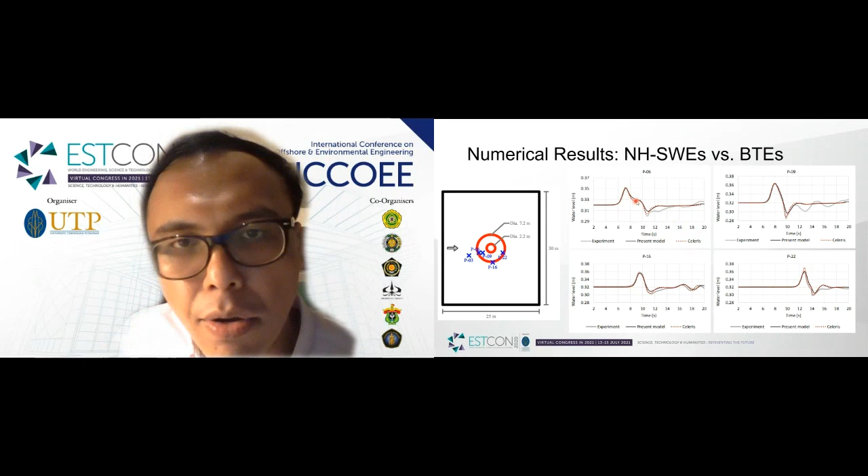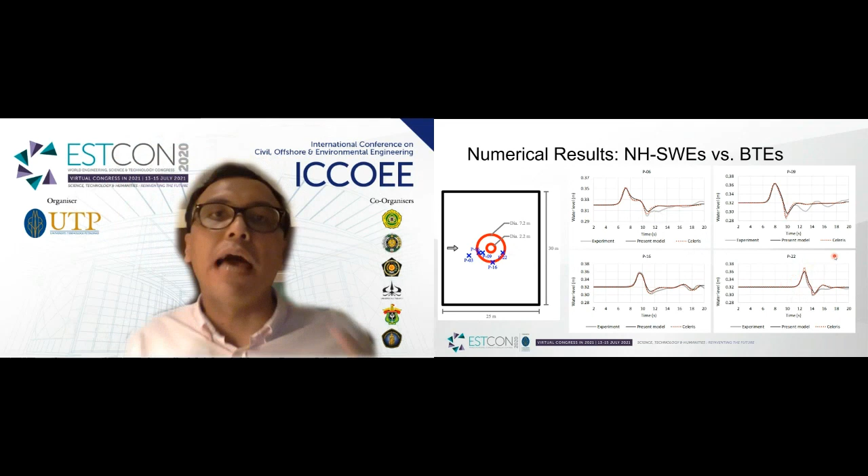Celeris can capture the wave more accurately than we do, but for example, on P22 near behind the conical island, our model can capture the wave more accurately than Celeris. So I will say here, our model can compete with the Boussinesq type equation models.

Let me conclude our work. First, our numerical method presented in this work is suitable for applications of non-hydrostatic flow, meaning it would be suitable for general water wave problems. Second, our model accurately computed the results when dealing with shock wave and wet-dry problems, as I have shown near the conical island.

And also behind the conical island, the collision of waves was accurately and stably simulated. The last point is this work also revealed that the non-hydrostatic shallow water equations models can compete with the Boussinesq type equation models in terms of accuracy. So it will be interesting to develop the non-hydrostatic shallow water equation models in the future. Thank you very much.